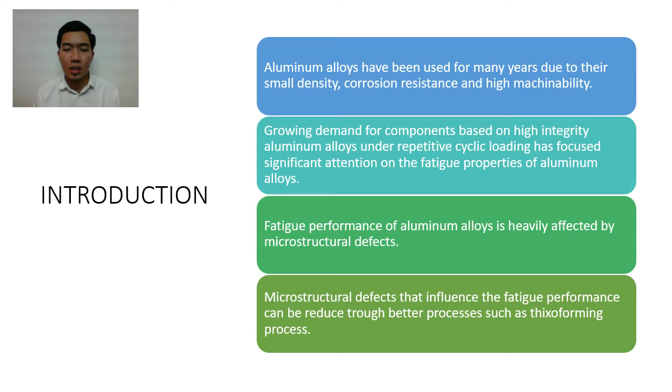But there is a problem in the department of fatigue, where the fatigue performance is heavily affected by microstructural defects. These microstructural defects that influence fatigue performance can be reduced through better processes such as the Thixoforming process.

For the problem statement, the engine piston and cylinder head are constantly subjected to rapid cyclic loading and fluctuation of temperature in the combustion chamber, such as piston, diesel engine, and compressor. Hence, these components are prone to fatigue failure.

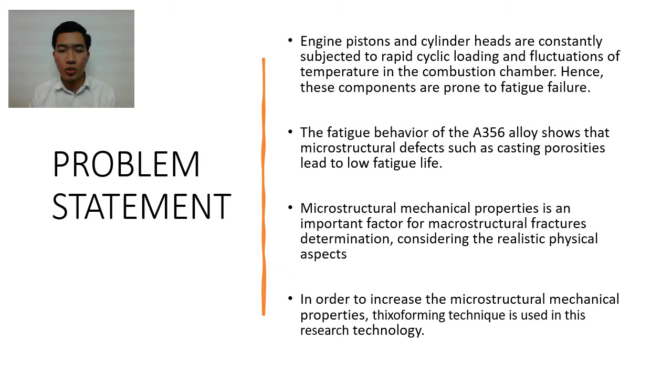The fatigue behavior of the A356 alloy shows that microstructural defects such as casting porosity lead to low fatigue life. These microstructural mechanical properties are an important factor for macrostructural fracture determination, considering the realistic physical. In order to increase the microstructural mechanical properties, the Thixoforming technique is used in this research.

My first objective for this research is to analyze the fatigue improvement of aluminium A356 between Thixoforming and casting process. Second is to evaluate the enhancement of T6 heat treatment on the fatigue performance and the microstructure of A356. And the third objective is to identify the optimum parameter for producing heat-treated Thixoformed A356.

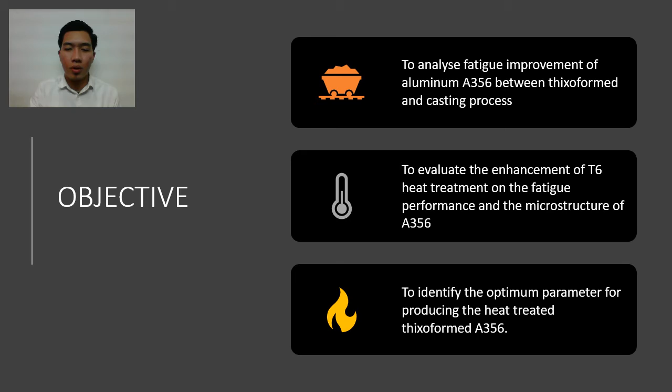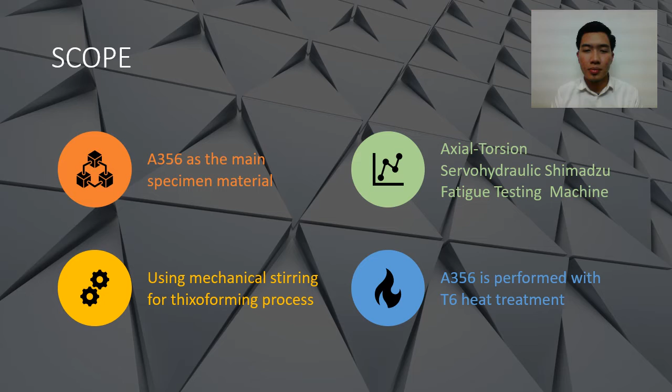For my scope in this research, first, A356 is the main specimen material. Second, for the Thixoforming process, I use the mechanical stirring method. For fatigue testing, the machine that I use is the axial torsion servo-hydraulic Shimadzu. And lastly, A356 is performed with T6 heat treatment.

As a literature review, the purpose is to identify research articles before I proceed with my research. The first article that I read is Effect of Temperature on the Fatigue Cracking Mechanism in A356 Aluminium Alloy. This article was published in

2020. In this article, the experiment was held at room temperature, 150 degrees Celsius and 200 degrees Celsius using a cast A356 aluminium alloy. By increasing the temperature, fatigue crack initiation changes from transgranular at room temperature to intergranular at elevated temperature.

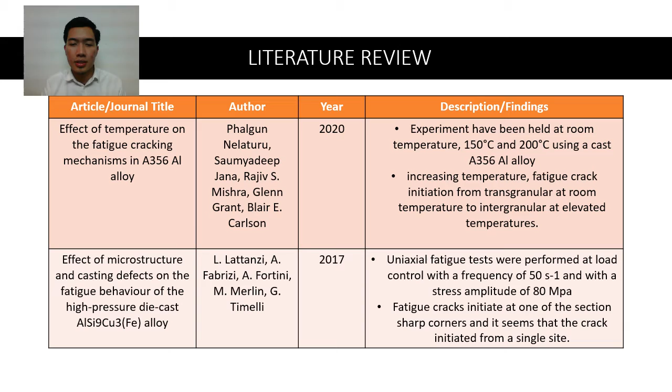Second is the Effect of Microstructure and Casting Defect on the Fatigue Behavior of the High Pressure Die Cast. This article was published in 2017, where uniaxial fatigue tests were performed at load control with a frequency of 50 Hz and a stress amplitude of 80 megapascal. The fatigue crack initiated at one of the section's sharp corners, and it seemed that the crack initiated from a single site.

The next article that I read for this research is Effect of Al2O3 Addition on Characteristics of Aluminium-Copper-Magnesium Composite Produced by Thixoforming Process. This article was published in 2019, where the Thixoformed composite has better mechanical properties such as decreased porosity, high hardness, and wear resistance compared to the cast composite.

Lastly, An Overview of Semi-Solid Processing of Aluminium Alloy. This article was published in 2012. Magnetohydrodynamic (MHD) stirring is the most popular feedstock technique because it can increase tensile and yield strength.

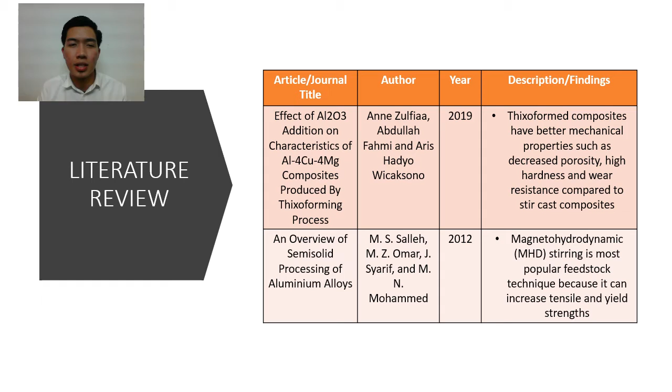For the methodology and study flowchart, firstly I start with problem and objective identification. After I have identified the problem and objective, I go to journal and article research. From this research, I research more on the method of casting and Thixoforming process, and also the fatigue testing.

After the journal research, I set up the experiment and prepare the specimens. After specimen preparation, I will subject the specimens to fatigue testing, and after that I analyze the correlation with this study. Then I will get the result, and if yes, I will proceed to the conclusion, and if no, I will repeat from the specimen preparation step until I get the best result.

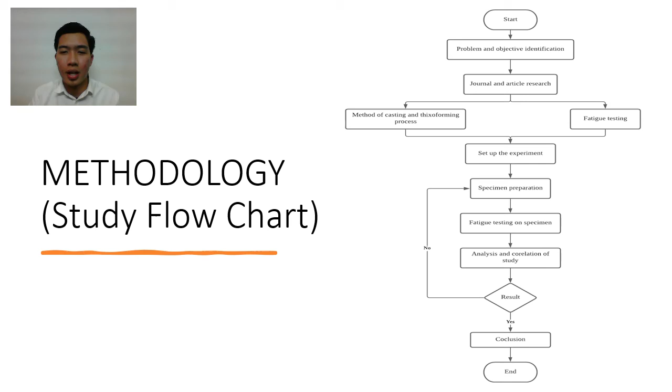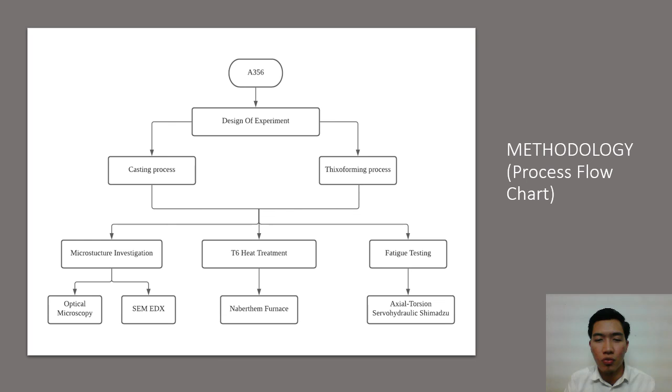Besides that, I will also do the T6 heat treatment on these specimens using a Nabertherm furnace. And lastly, I test their fatigue performance using the axial torsion servo-hydraulic Shimadzu. These are my testing machines: optical microscopy and scanning electron microscopy SEM EDX for the microstructure, and the axial torsion servo-hydraulic Shimadzu for the fatigue testing.